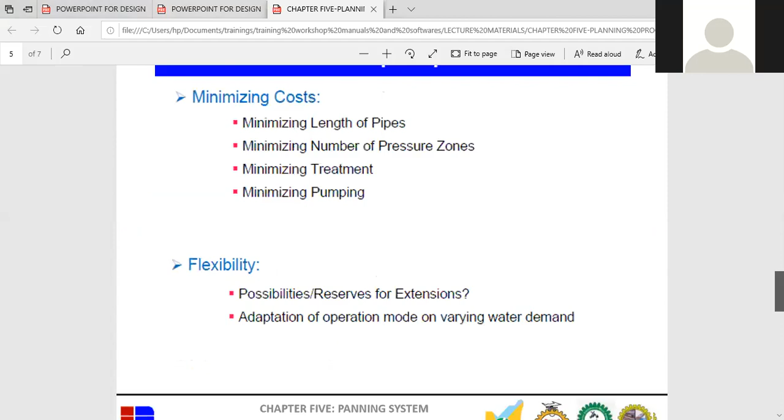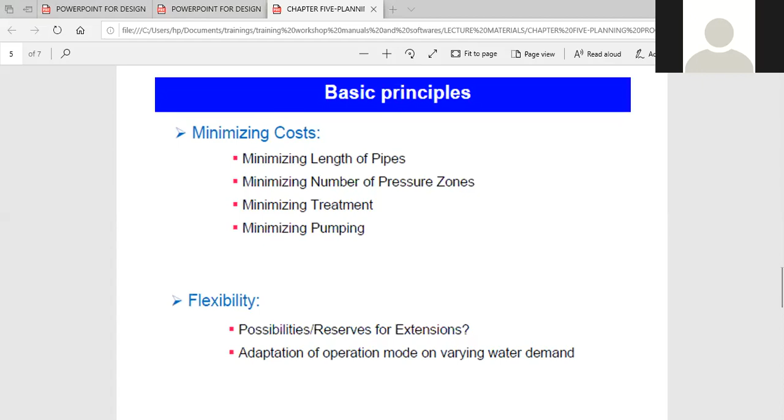Okay? Let me digress a little bit. Let me open one of these lecture materials. I've sent you this. Let me open this. Okay, this is chapter 5. They have 8 chapters. So let me just show you an example of what I'm talking about. For instance, okay, not in this one. I'm opening the wrong chapter, sorry. Chapter 1, introduction.

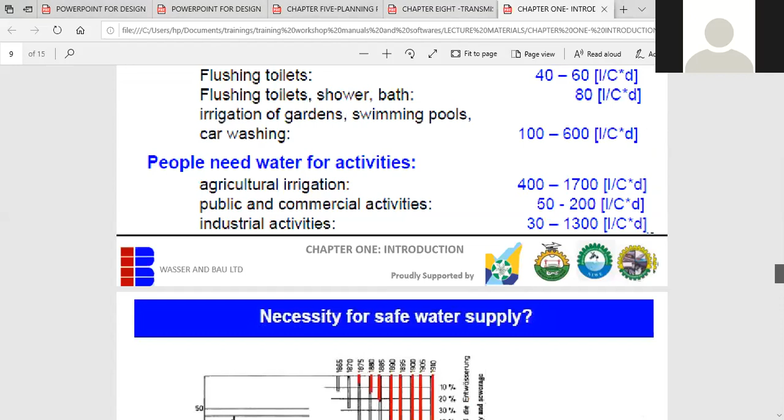So in design, if you're doing a design, it's not something you do by hand. You need charts, you need tables. For instance, this is an example, just to give you an idea. Are you seeing my screen? Yes. Good. Drinking water, for instance, is 3 to 10 liters per person per day. These are all standards, and I'll give you those standards.

What was the LCD? The unit? Okay, the unit is liters per capita per day. LCD, liters per capita per day. Yes. Listen to me, if somebody says liters per hectare, your mind should tell you it's talking about irrigation. Per hectare.

Now, there's what we call land use. If you are designing for a place where there are no houses, you're going to make use of what they call land use. And land use will tell you how many people per hectare: low density, medium density, high density. It depends. Let me not digress too much. I'll still come to that.

Now, look at this. You can see what you need in a day: car washing, irrigation, flushing of toilets, washing of clothes, and everything. These are just their ranges. But at the end of the day, we expect to have between 100 and 150 water demand per person. Sorry, the unit is expressed in liters per capita per day.

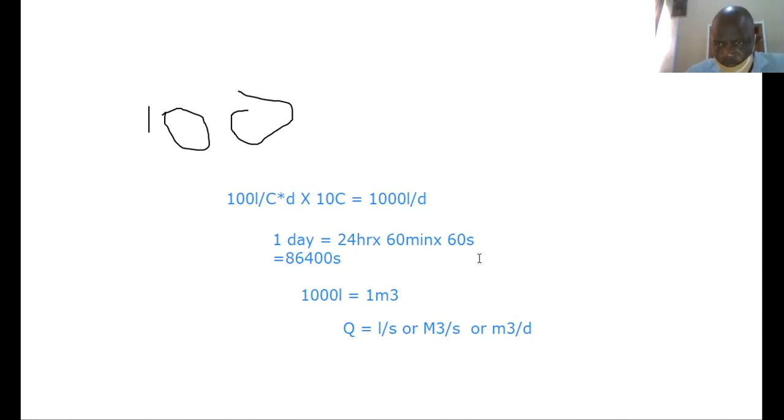Now, everything about water reticulation is simply to design your pipe sizing. In the water reticulation, your major aim is to design your pipe. That is the design of the pipe. That's the major thing, because designing the pump is not difficult.

Just what is the head difference? What is the pipe length? And then what is the frictional coefficient of the pipe? Give me those three values, I will tell you the pump you need. What is the vertical head loss? The horsepower? What is the horizontal head loss? If you add the two, and then of course, what is the internal head loss in the pump? With those three, you design the pump. So designing the pump is not a difficult thing.

But our emphasis, our aim, is to design the pipe network, because it is the pipe that conveys the water. If the pipe is too big, problem. If it is too small, problem. What about the thickness of the pipe? The thickness of the pipe is a function of pressure, and a function of pressure is a function of height.

So if you know the height, it will tell you whether it's 8 bar, 6 bar, or 10 bar. But as a standard in Nigeria or in Germany, which also relates to Nigeria, the minimum bar pressure of a pipe or cum thickness is the one that will resist 8 bars. I repeat, you can write that one down: 8 bars. Not the minimum, pardon me, the maximum. Maximum pressure required in a network is 8 bars.

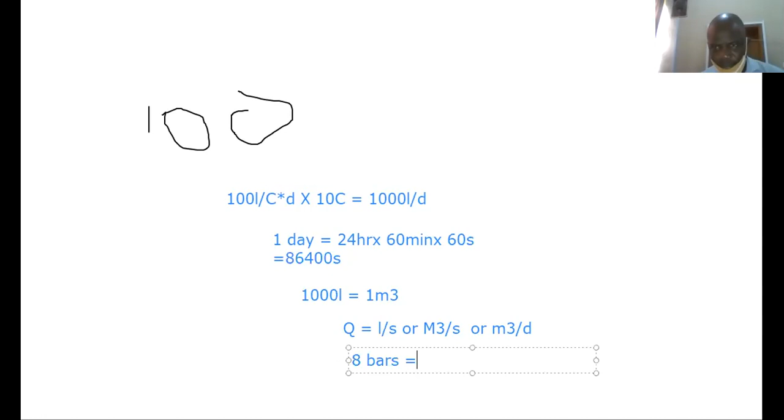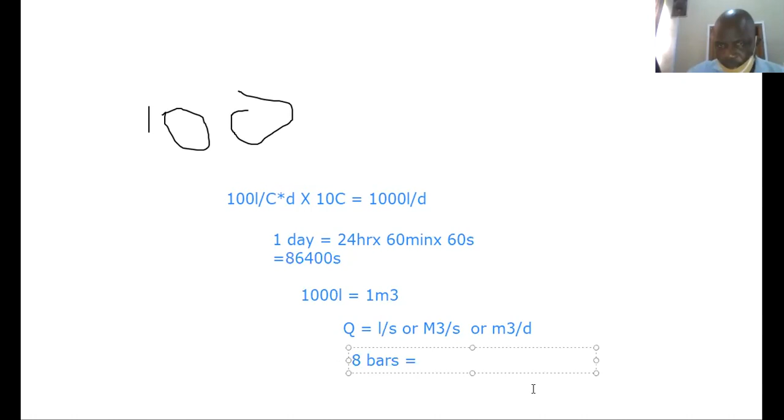These 8 bars is equivalent to 80 meters. You know why? Yes, because we assume, on a layman's language, that 1 bar is equivalent to 10 meters of water. Yes, 1 bar is equivalent to 10 meter cube, or 10 meters of water above sea level.

I'm with you. In other words, if I want to achieve 1 bar, I pump water from a height of 10 meters. If I want water to hit you at 1 bar, I'll climb 10 meters. I can see a 10 meter height building, I stay on top of it and throw water down. It will fall under gravity, of course. If you are at the lowest level, that water is hitting you at 1 bar.

Let's not digress, let's go back to where we are. We'll still come to all this. So my screen again, let me go back to my screen.

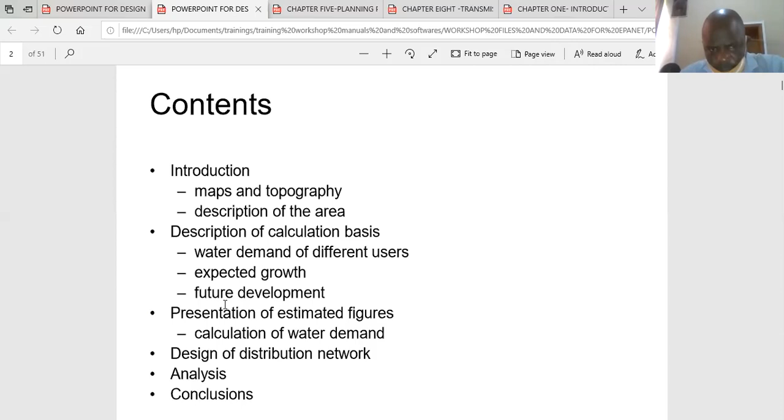Future development, expected growth and future development. I was privy to know about the design of Owerri, Imo State. Before the war, during the premier of Eastern Region, when they designed Owerri, I believe it's also so in Ibadan, one state in the southwest that was well designed. Let me demonstrate it through my whiteboard.

You make provision for your end pipes. At your end pipes, you make provision for future development.

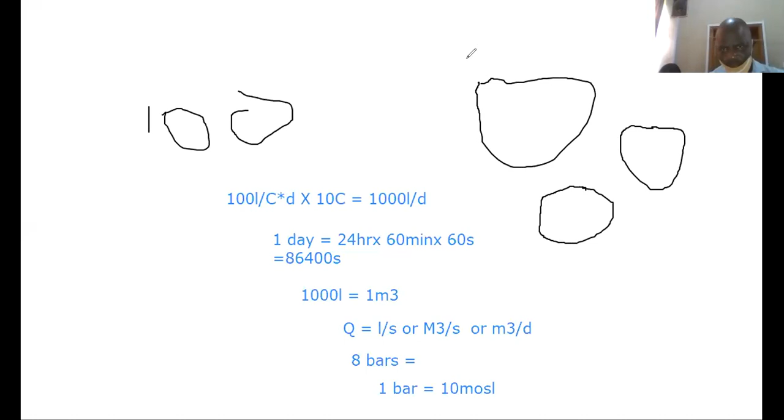Let's say, for instance, this is the city as it is now. In the future, there's going to be Ogun State, there's going to be Agbara here, there's going to be Redeem Camp here. And your water tank is somewhere here. So when you are distributing to the main city, this is the main town existing now. You know there's going to be future development of Redeem Camp here, but it's non-existent yet.

And there's going to be Agbara Industrial Park here. So you estimate based on the land use and the size of the land, how many people are going to be in this Agbara. Hold on, let me turn on my annotation.

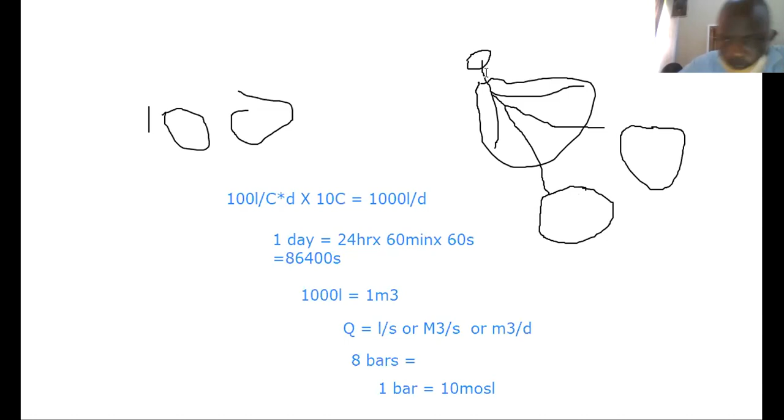Now you ask yourself, what is the population of this area in the future? So, assuming this pipe size, we are providing this pipe size. I'm digressing because it's one-man training, so I can digress. And here you have a 75 pipe size.

Because of what you're expecting here, the pipe size you're expecting might be 100, because Agbara is going to be an industrial area. You will be forced to go and change this to 150, to accommodate it. Now you understand what I'm saying.

That is future, you must factor in future development, right from the onset. That is what I was trying to refer you to, the Owerri scenario, that was during the British, of course.

They did the right thing. What they did was they knew this city was going to expand in the future, so they used big pipe sizes to start with. You would think they are oversizing or they don't know what they're doing, but no, they are factoring in the downstream districts that are going to come up.

So let's go back to this content. The next thing you do, you now estimate the water demand. Now you've done the water demand calculation, isn't it? And you have estimated the population per person per day. By now you've gotten your value, you're going to design it.

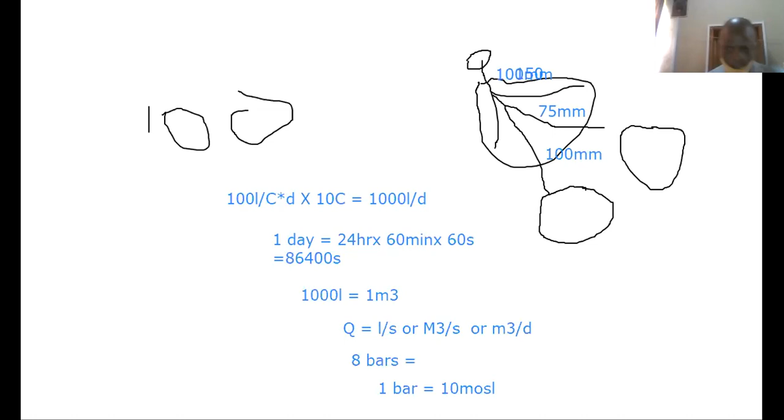The topography will help you understand where you're going to locate your upper reservoir or elevated tank. The terrain, you need to know the terrain. The major thing you're looking for is to know the highest and the lowest points. That's the landscape, you need to know the highest and lowest points. What do you need the highest point for?

So that you know how to lay your pipe. No, the highest point. You are right, you know how to lay your pipe, that's important. But you need the highest point so that you know where to locate your tank. When I say tank, I mean reservoir. Underground tank, good. So the tank should be located at the highest point. Yes, exactly. You know why? Gravity. Gravity, yes.

Then you need to describe the area. The person needs to describe the area. While describing the area for you, what do you look out for? When we are looking at the area, it is for us to know the water source, and to know whether the water is surface or underground water, and also where to locate the reservoir. Thank you.

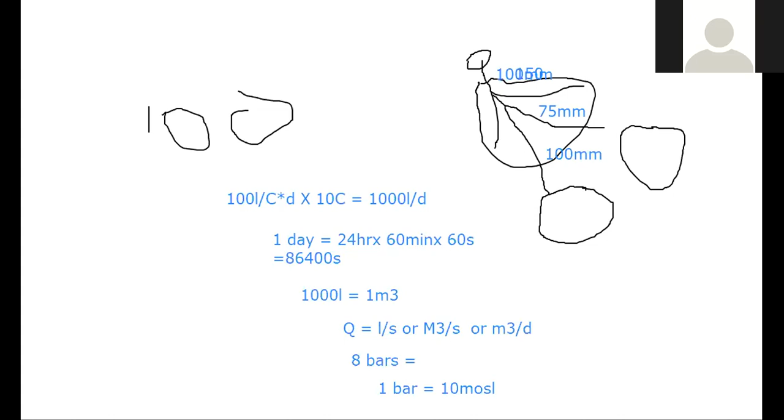Okay, you're back. Yes, fully back. Okay. Sorry. So let me demonstrate something for you now, all this thing we just said. Clear all drawings.

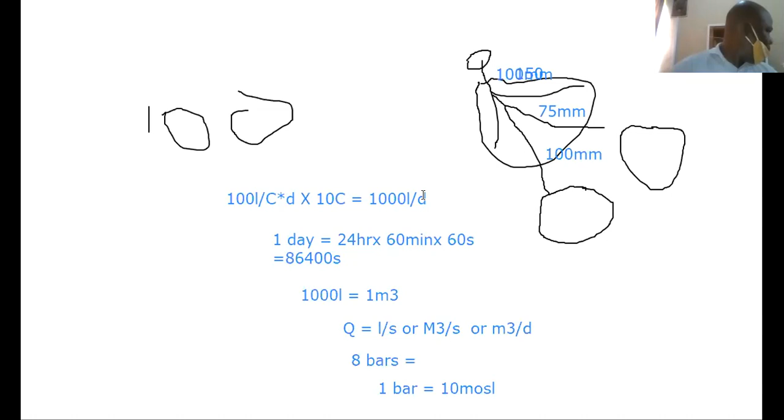In your estate, I don't know where you're staying, in an estate? Yes, I stay within an estate. Okay. Let's do a design for the estate, for instance. Now, the estate is a built area, so we can use population equivalent. We can count houses, numbers, okay? If it's an unbuilt area, I'll make use of land. In the Nigerian Land Use Act, a particular size of land has a certain number of persons expected to be inside it. Are you with me?

If you buy a 1,000 square meter land, it's impossible that 50 people are going to live there, unless it's in Manhattan or New York City, where you can build a 20-story building, with maybe 5 people per floor. I'm just trying to give you an idea. So every location has what they call land use. In some areas in Abuja, they will tell you that it is 500 persons per hectare. Some areas, they will tell you 1,000 persons per hectare.

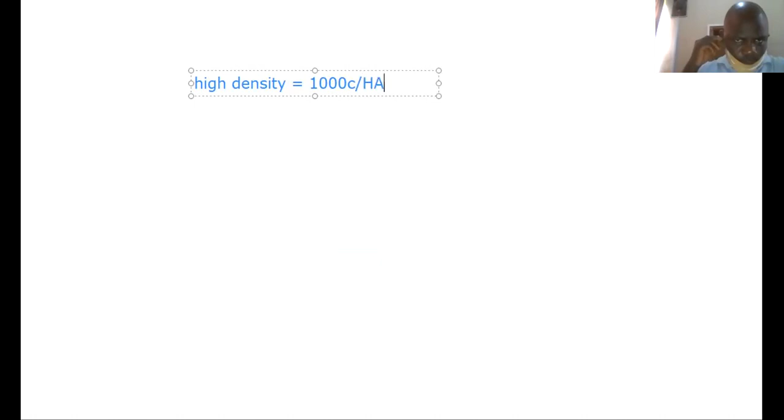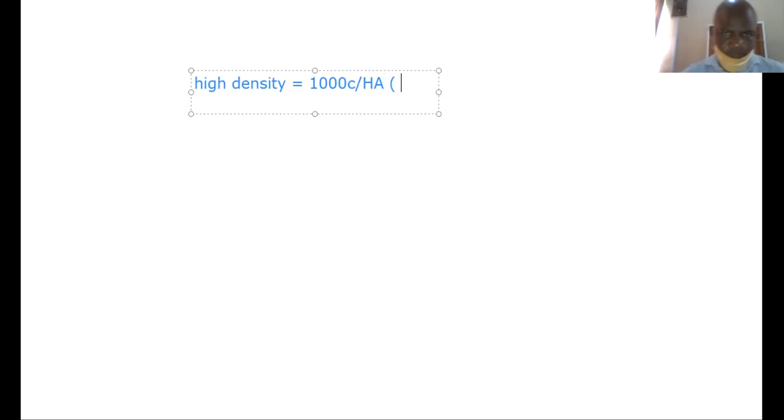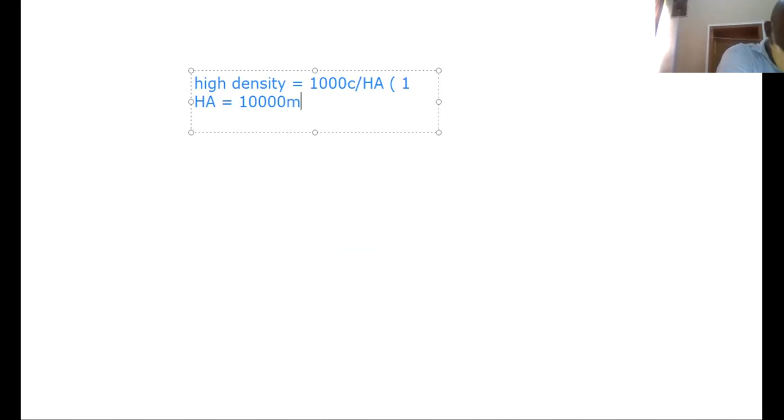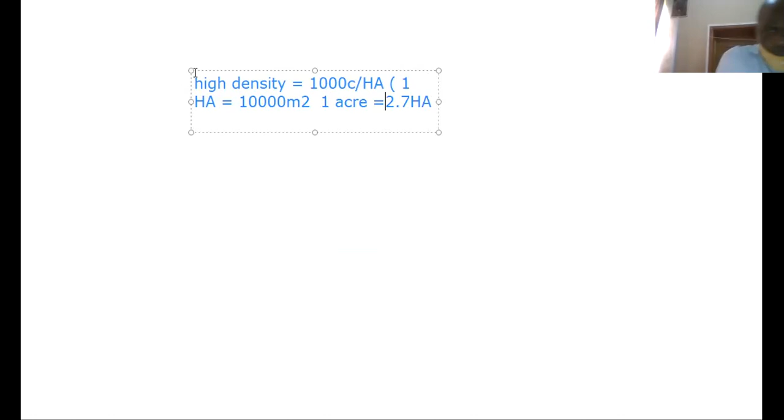I can also say the unit is per acre. A hectare is more than an acre. 1 hectare is equal to 10,000 square meters. What about acre? 1 acre is 2.7 hectare. It's okay. Thank you. 2.7.

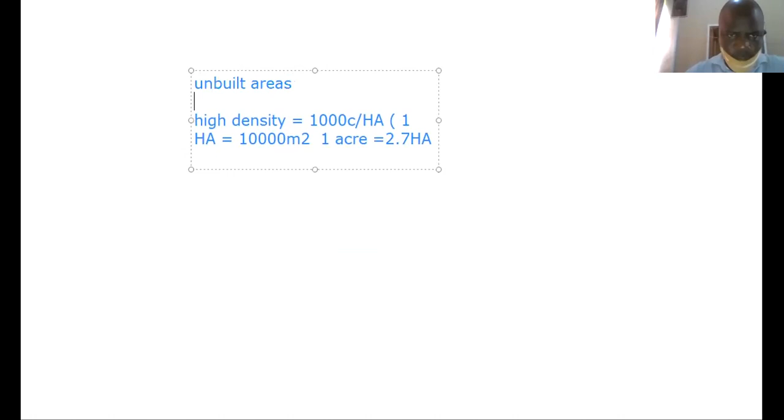So let's call this unbuilt areas. That means you're talking about empty virgin land, no human beings inside. You can say low density, just like for future expansion. It's like a specific unit of development. I mean unbuilt area. Districts or virgin districts.

Medium density. It's okay. We have medium. We have ultra high, but let's not go into that. Okay. Yes, very high. I don't know their value.

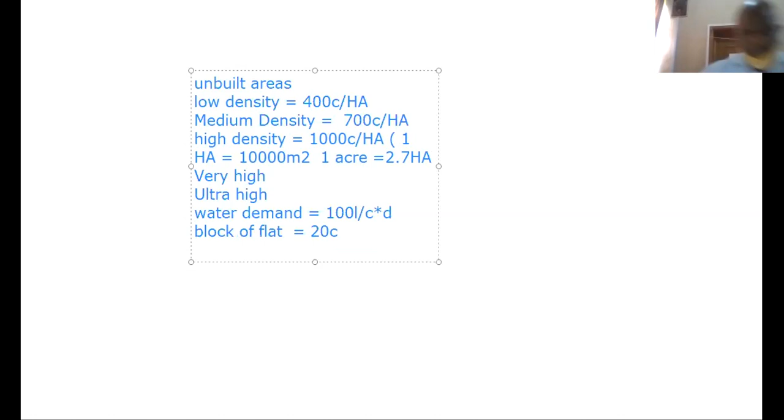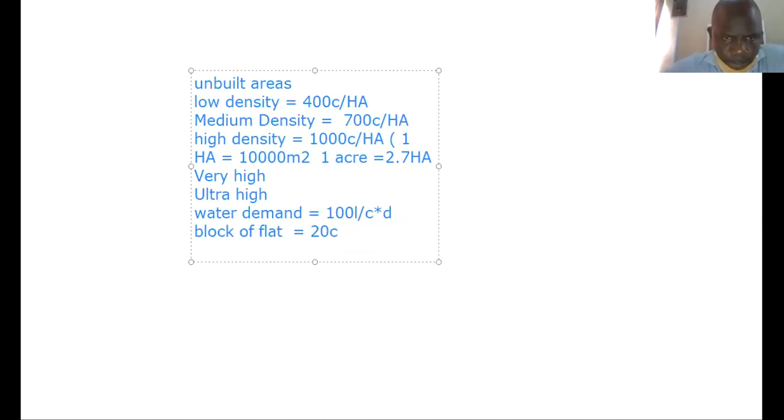How many people are in each block of flats? 20. Per flat, per house. Yes. Let me use something that is reasonable. Sorry, let me not say block of flat. Let me say a 3-bedroom. Yes, thank you. Because 3 will be different from 2. Bungalow. In that case, let's say 10 persons. I know you tell me 6 or 7 or 8, okay?

But if we apply a population growth ratio, and let's assume in 30 years time, it's going to be 10 persons per 3-bedroom. It's going to be 10 persons. It's okay. Yes. If you didn't see capita, you can see PE. PE means population equivalent. Population equivalent.

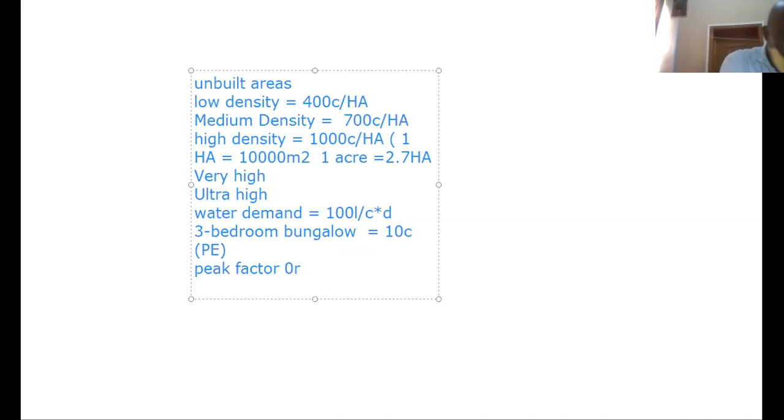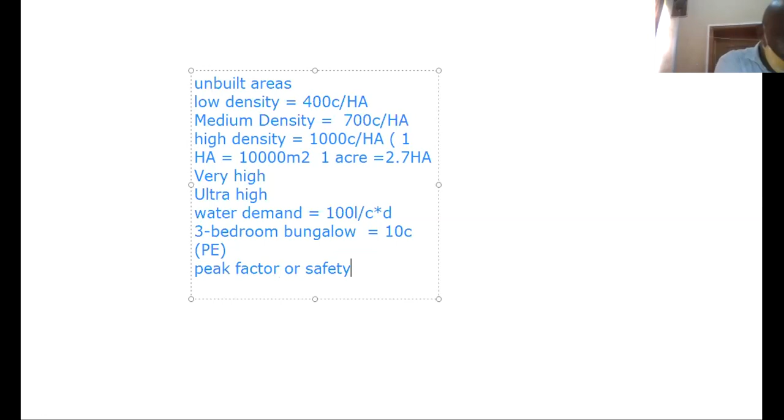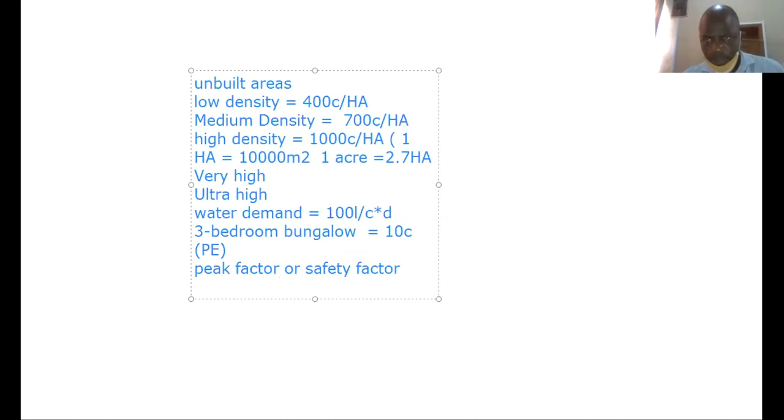Now, there's what we call peak factor. It's okay. Peak factor, or you call it safety factor. Is there a template? Is there a template or? No, I want to show you from first principle. I want you to grab the first principle. It's okay. Thank you. Now, when we say peak factor is just like safety factor, okay? It varies between 1.3 to 2.3. Range. Yes.

Femi, when you do your design, do you submit your design like that to your clients, or do you multiply by a certain factor of safety? Yes, it depends on the parameters, factors, and also the chart you are using. Good. Now, in every engineering design, including water, there's always a safety factor. You must apply a safety factor. Is this constant? It's not constant. It depends on the number. It's in your material. I'll still come to that.

It's okay. Now, safety factor. Let me explain to you. This safety factor is what takes care of some unforeseen circumstances, such as leakages, losses, change in design values. Sometimes you're not sure of yourself. And when you're not sure of yourself, you just multiply your final value. If a client gives you a bill to do and you got 100 million, you know it's not wise to tell him 100 million. You multiply by 1.1 or 1.2. Okay? In case, for instance, there are changes in market value. Or there are changes.

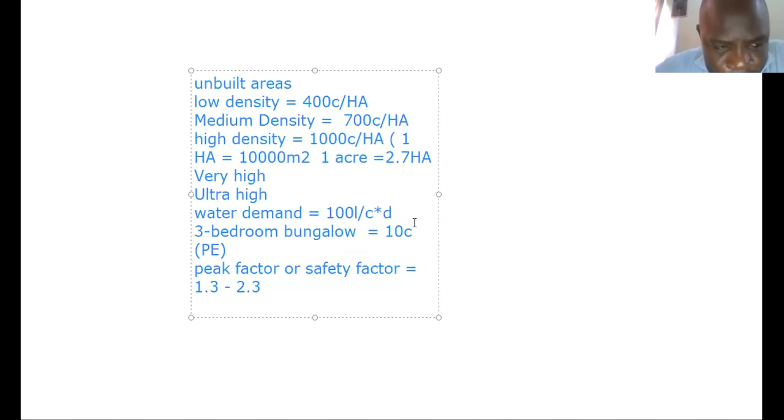Let me give an instance. It's just like an estate. 25 floors, and each floor is about 3 meters. So you're talking about 75 meters high. Did you get it now? At 75 meters high, you're talking about approximately 7.5 bars. Pressure? Yes. The pressure difference between the highest point and the lowest: the person staying at the last floor and the person staying at the first floor.

So I can bet you somewhere at the middle, there must be a water tank. That water tank is to cut off the pressure, because if the person at the ground floor is taking water from the topmost tank, if he opens his tap, there's a tendency that the rush of water, the pressure of water at his tap will blow the tap, if they just have one tank at the topmost. Unless they are going to use some pressure reducing valves. So let's go back to where we are now.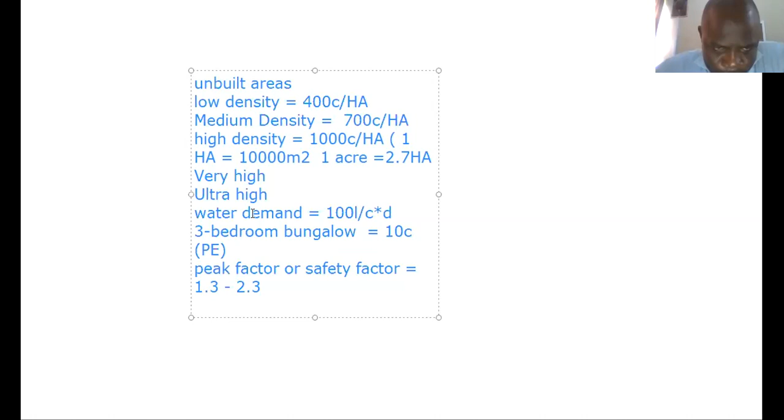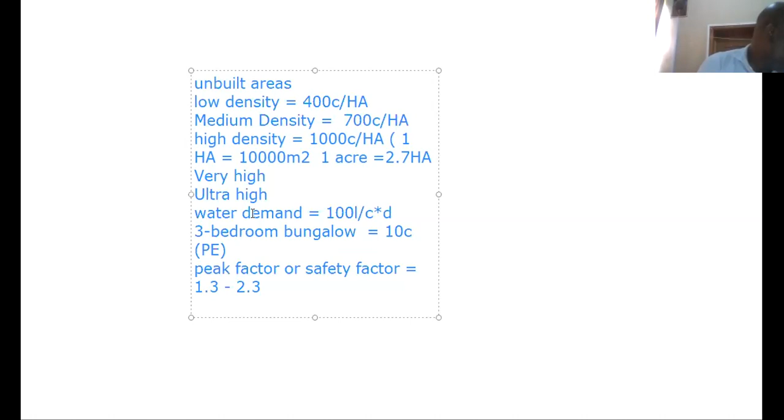Now look at our routine. If you are now staying in a 3-bedroom bungalow, and we said that each person in your house, based on national standard, is using 100 liters of water. Okay? And there are 10 people in the house. It means that the water demand of the house is going to be what? 100 times 10. And that would be what? 1,000. 1,000 liters per what?

Capacity. It's okay, because you multiply by 10. So capacity, it's okay. So what it means is that if I want to service your 3-bedroom bungalow now, I'll come and provide a 1,000 liters tank for you guys. Per day.

It means if I want to be recharging your water every 2 days, how many liters will I provide? If it's every 2 days I want to be refilling your tank, it means I'll provide 2,000 liters and above. Remember, we're talking about minimum value. Do you have a tank of that capacity? Yeah, 2 is simple. Most of what we have is 1.5 to 2.5.

You know, this 1,000 liters is the same thing as a 1 meter cube tank per day. For each unit, for each 3-bedroom of 10 people. If I have too much money, I can make it more than this. It's nobody's business.

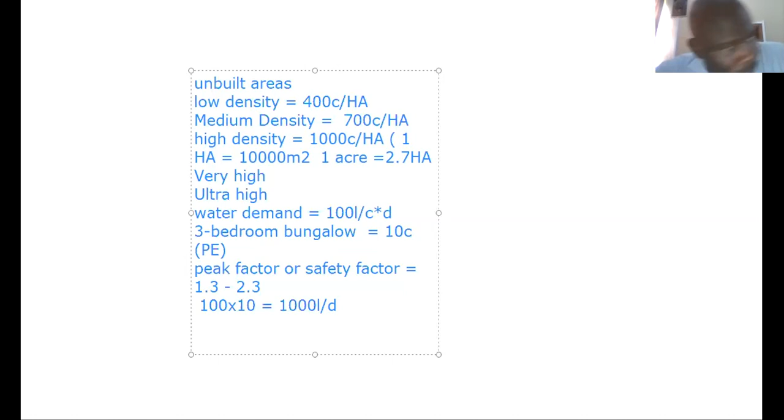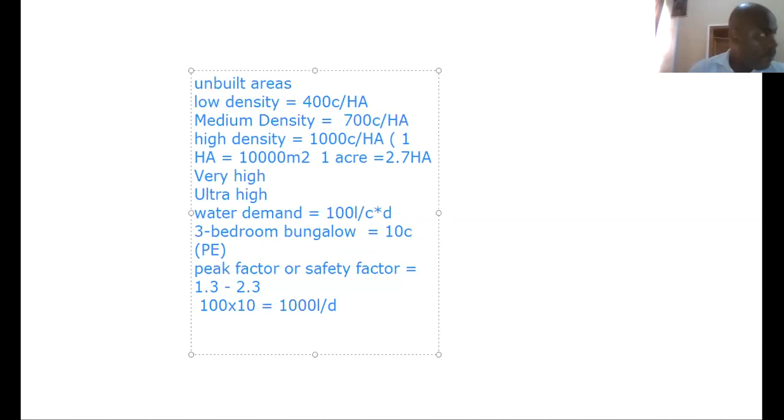The reason is that if you are designing for a very large group, we say that variability is low. Yes, the safety factor is low. Good. The reason is that if I'm designing for a large number of persons, I will not worry about too much fluctuation because the fluctuation will be written off somehow. If you're working with large data, the error will cancel out somehow. But if you're working with smaller data, the standard deviation will be so high. Good.

So now let's choose a peak factor of 2 just for ease of calculation. That means this value becomes 1,000 times 2. Does it make sense? 2,000. Now let me give you one layman's knowledge. I've done a calculation for your house and I got that 1,000 liters is enough for you guys. But in my wisdom, as an experienced engineer, I provided 2,000 liters. Will you say I'm stupid?

Just to make provision now. Good. I'm even making provision in case I could not recharge your water on Tuesday. Yes, yes. And that's why the safety factor is there. Or peak factor. So now it means I need 2,000 liters of water per day for each flat, per house.

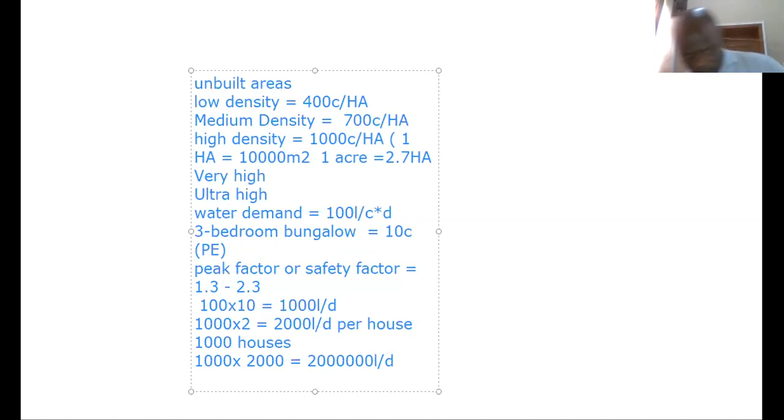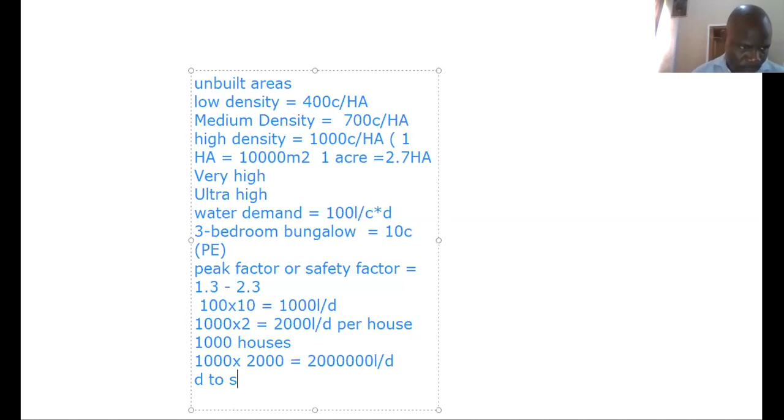Now the next thing is how many houses are in your estate? Let's assume there are 1,000 houses. So the water demand of the estate becomes 1,000 times what? 2,000. That becomes 2 million liters per day. But we said that we want to convert day to seconds to allow for water distribution. Multiply by that.

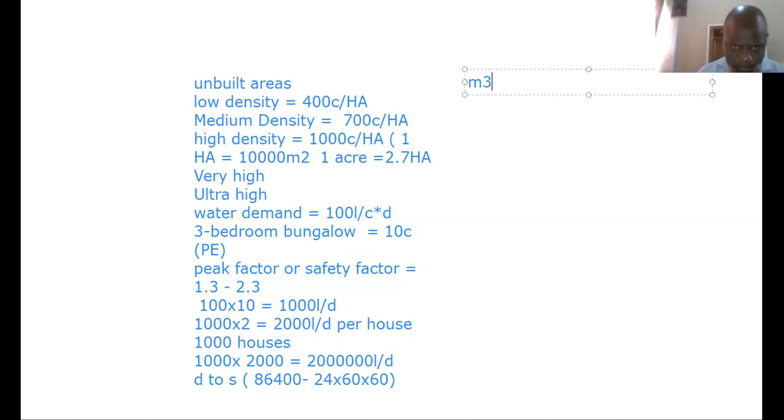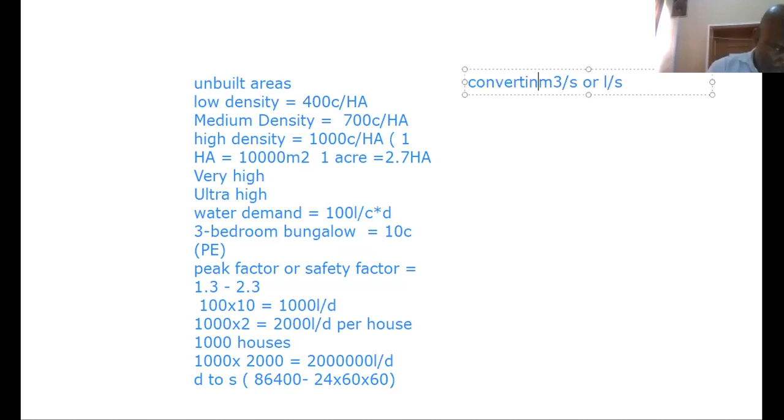Are we together? Yes, we are. These 2 million liters, let me start here. I'm going to divide it by what? Not 24, just say 86,400. Now, we want to convert it to meter cube per second. You divide by 1,000. So that would be 2 million divided by 86,400, and by 1,000 to meter cube.

Okay. I get you, brother. You are following. You are really following. Huh? I hope you don't get confused. No. This one is a familiar terrain. Does it make sense? Yes, very, very well.

So you are changing it to seconds now instead of day. I'm converting two parameters at the same time, to meter cube per second. So the value now, I'm using my calculator: 2 million divided by 1,000, then divided by 86,400. It's giving me 0.023 meter cube per second.

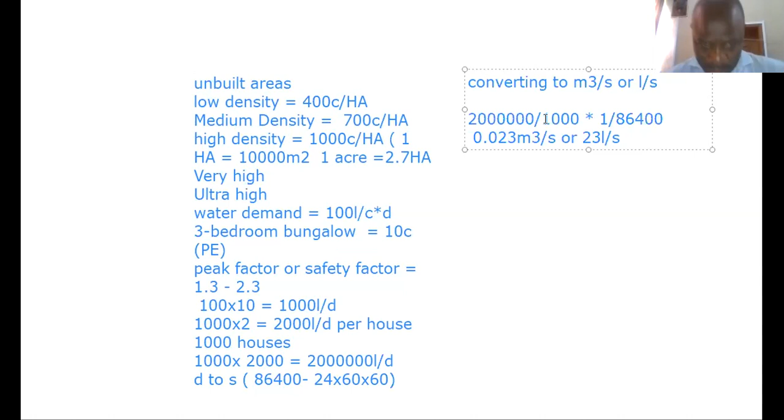And I think with the peak factor, since what we need per house is 1,000 liters per day, and with the peak factor, we've been able to get 2,000 liters per day, so all those things will have been factored in.

So I'm happy you are following and you're getting it. That's why the peak factor is very necessary, my brother.

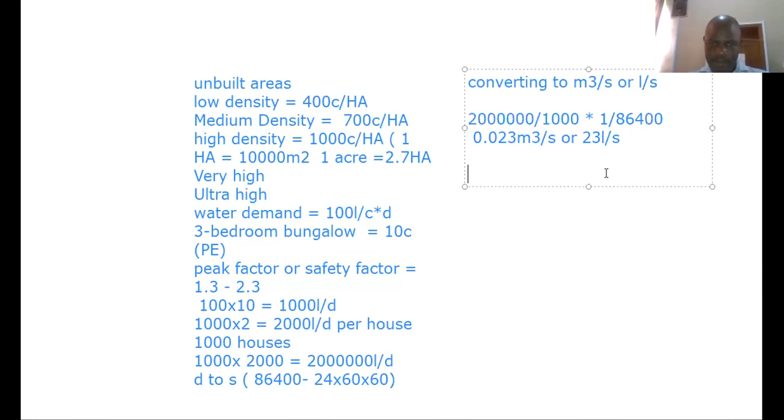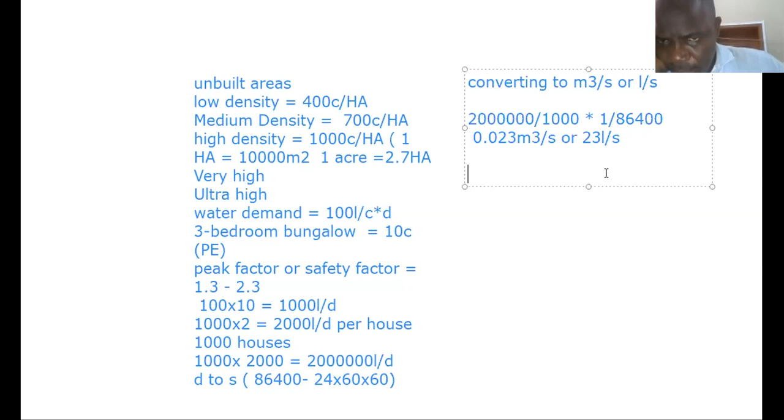Now, with this 23 now, the next thing you do is you go and ask yourself, what pipe size can convey this material? Now, for you to get the pipe size, there are 3 parameters you need to look out for. The first parameter is called frictional factor.

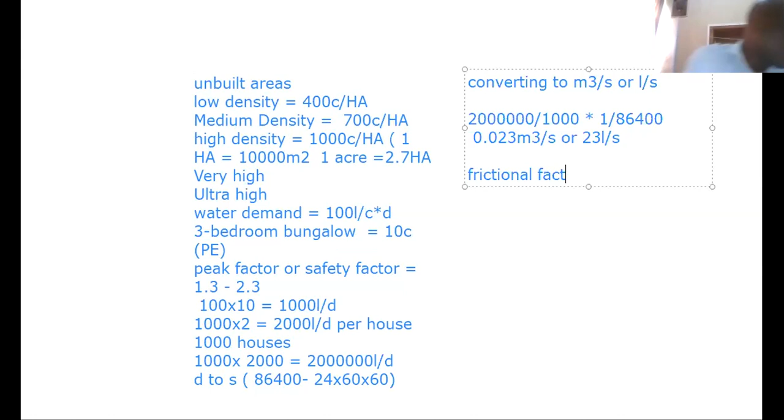Frictional factor, roughness. Frictional factor of the pipe, or roughness of the pipe. I think this is as we also cover for corrosion. See, this is about fluid. Fluid is fluid. Whether fluid mechanics or hydraulics, it's the same thing.

Number 2, you ask yourself, what is the slope of the pipe? Number 3, what is the expected flow in the pipe? The Q, or the demand? The Q should be the flow rate.

The same thing. Or what? The demand. Or some people can say, what is the discharge? All these things mean the same thing. And you know that discharge is equal to AV, or AIC.

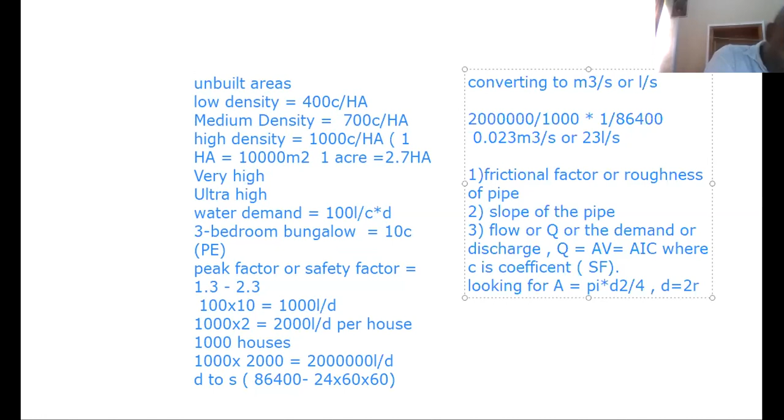So if you see all these PVC pipes, especially these white ones, their frictional factor is very low. So 0.1, can you write? 0.1 is for PVC, it's okay. 0.4 is for iron, ductile steel, it's okay. The 1.0 is concrete. For concrete is what? 1.0, sorry, 1.0, it's all written there.

So let's continue. So now I want you to open that chart if you can. I may leave the... if I should open the chart, I will leave the call. Well, it's important you leave it, because if we want to generate this A through calculation, it will take us time.

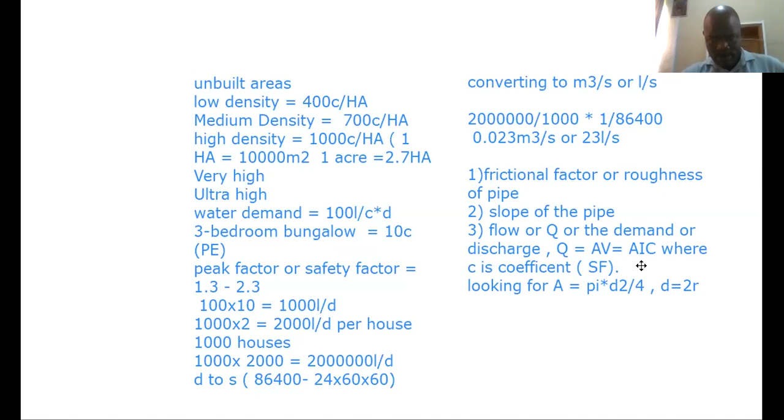I need to demonstrate this thing for you, but I bet you understand it. Yes, I will guess, I will try to get it. Just let us continue, okay.

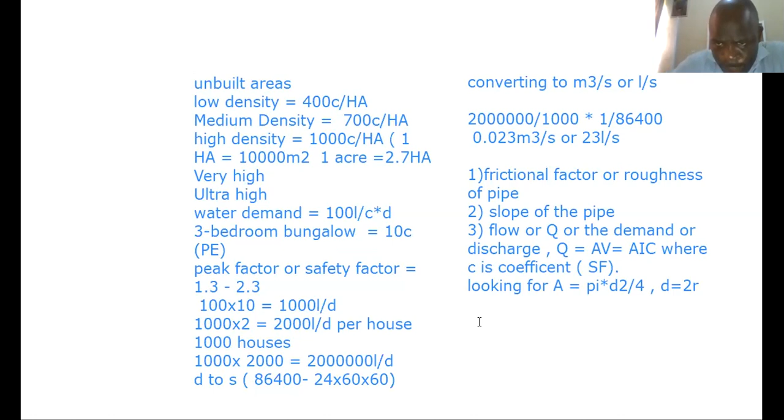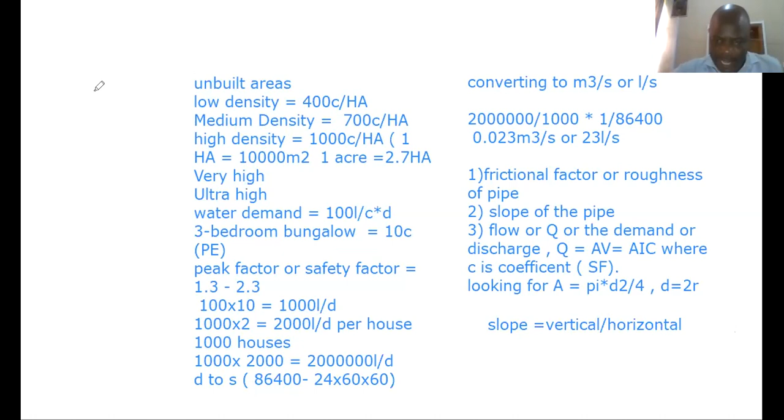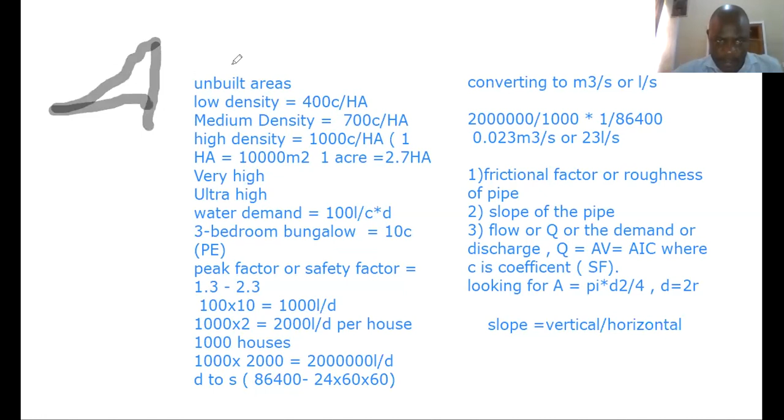So here, slope equals vertical over... the increase in y all over the increase in x. So if I have something like this, y there is the increase in y. Let the vertical be the y axis and the horizontal be the x axis, which is the same thing as gradient. This is vertical, that's the y axis. And the horizontal...

Yes, I get the concept. Hello? I can hear you sir, I can get the concept. That's angle of inclination, yeah. I can get the concept. Okay, so we can continue, eh? Yes, we can continue now.

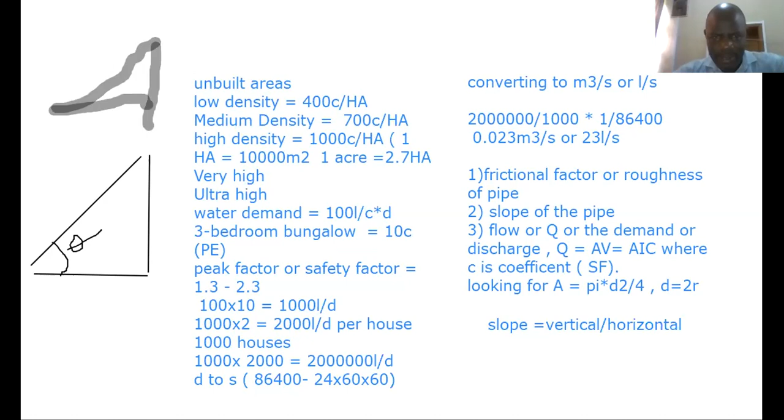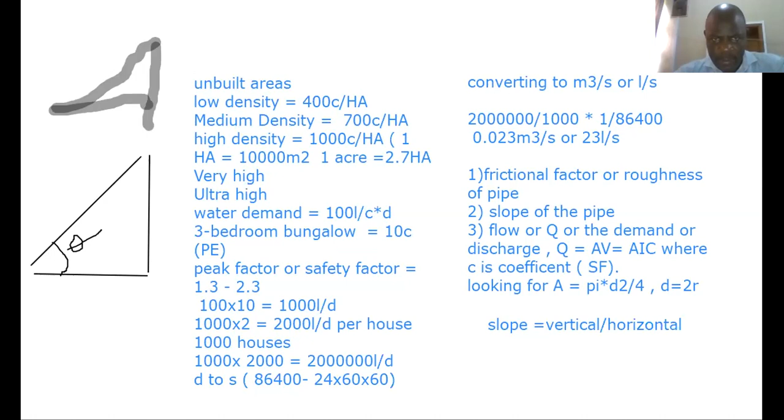You've sent the chart to me, but where can one download the chart or get the chart? Is there any handbook? No, actually, they give us this chart. There are many charts in the market. Some companies have developed their own charts. It's okay.

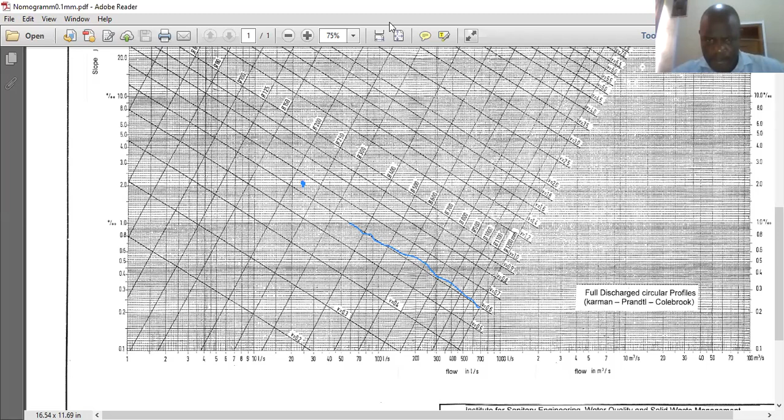Now, for this side, you can see that the pipe, where's my notation again? The pipe is between pipe 200 and 250. Can you see it? Yes. So in engineering, when you have such a thing and it's at the center, you choose the bigger one. So that means the pipe we need to convey these 23 liters of water is 250 mm.

And that is the design. That becomes the design. Did you get it? Yes. Good. That becomes the design. Any question?

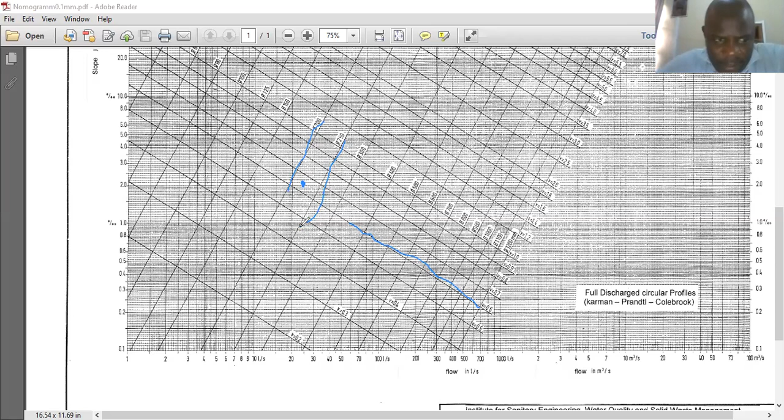I think with the materials sent to me, I just need to study them. Maybe by tomorrow, see what you can do for me, yeah? Yes. Normally this class lasts for 2 days, 3 days. Because of the online format, I put it at 3 days, but because it's only you, I will aim to crash it into 2 days, because you are following very perfectly. Imagine if we were 20 persons. Some people would be drawing us back. So that was why I put that extra 1 day.

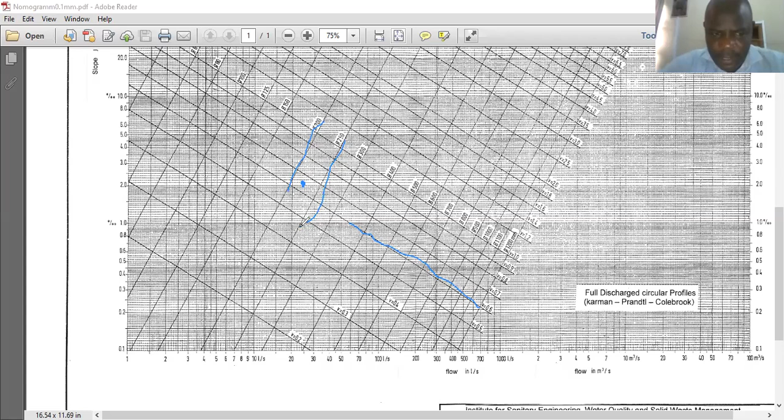So, but you have a lot of work to do. Those materials I sent you, I want you to go and read them up. The good thing is that you're already a chemical engineer. It's not going to be difficult for you, but if you do it, by tomorrow you will flow very well.

But before we call it a day, I'll have an assignment you have to do. So carry your pen. Let me show you. Now, that PowerPoint, have you opened your PowerPoint? The one I sent you. I will open it. I have not opened it. Please open it now. It's important because I want to give you one small exercise to do to consolidate what you have learned today.

Okay, let me open it. Good. This is the assignment. If you don't have it, you can use my screen, but it's good that you open it. Is it on the second material or the first? On the second email, the one that has the nomogram and the rest of it. I've downloaded it. Yes, I've seen the PowerPoint for design case. Yes, open it. Then go down until you get to this point.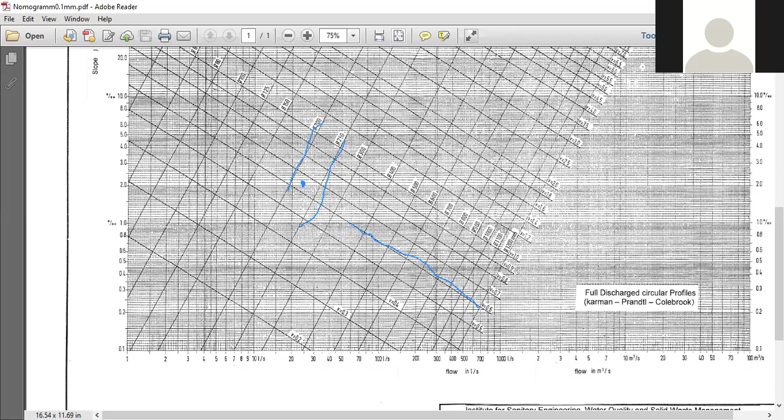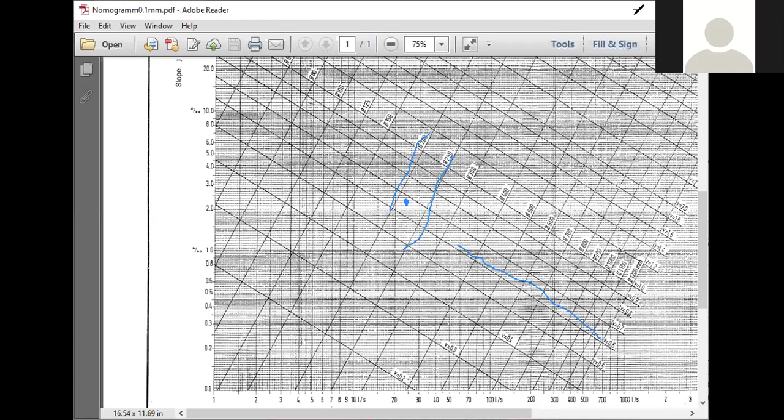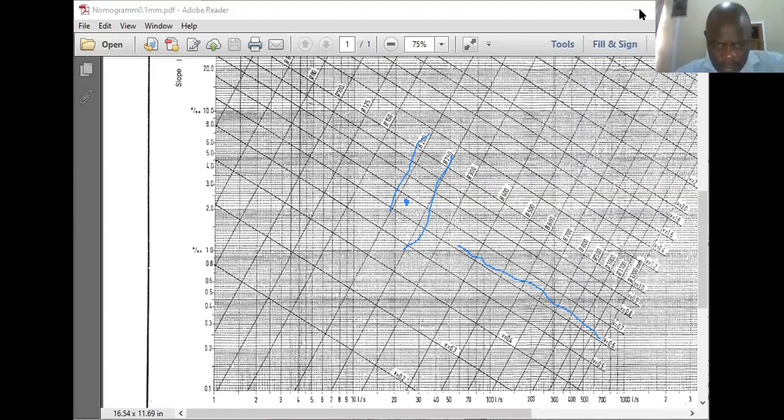Sorry, it's coming up. No problem. Yes, I'm there. This is a layout of a city. No, after the introduction, go down. Objective. Study area. Go down. I don't know the page I am. After the study area. Go down, look at my screen. Are you seeing my screen? I think what we still have there is the chart. Can you see it now? No. I'm coming. Can you see the layout? Yes, I can see the layout.

Primary pipe or main pipe is the one coming directly from the tank, and it's the most important one. If you get it wrong, others will fail. What they design in water reticulation is the primary. Once they design the primary, when development comes, you can design the secondary, because the head is already correct. In Abuja, our main primary pipe is 1.5 meter diameter. In Lagos, there's one tank I used to know where it's about 1.2 meters. One big tank, one big pipe.